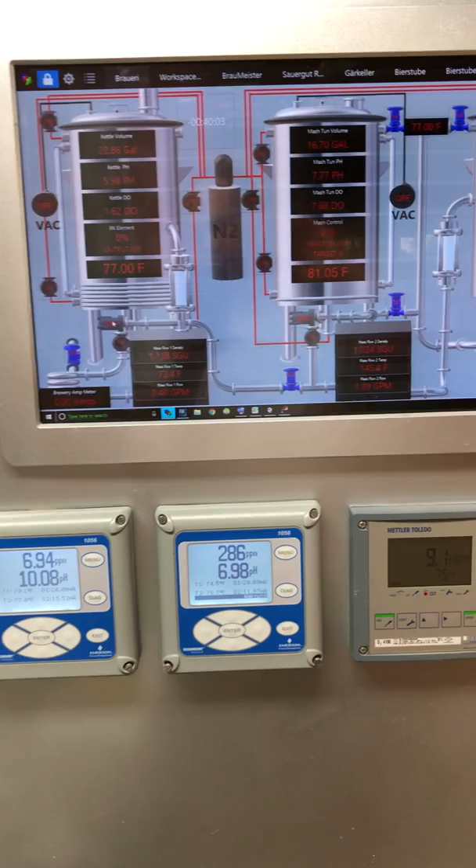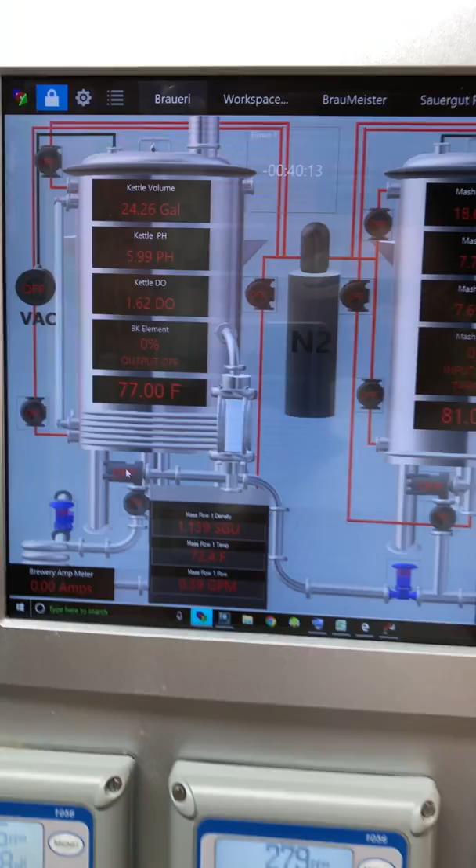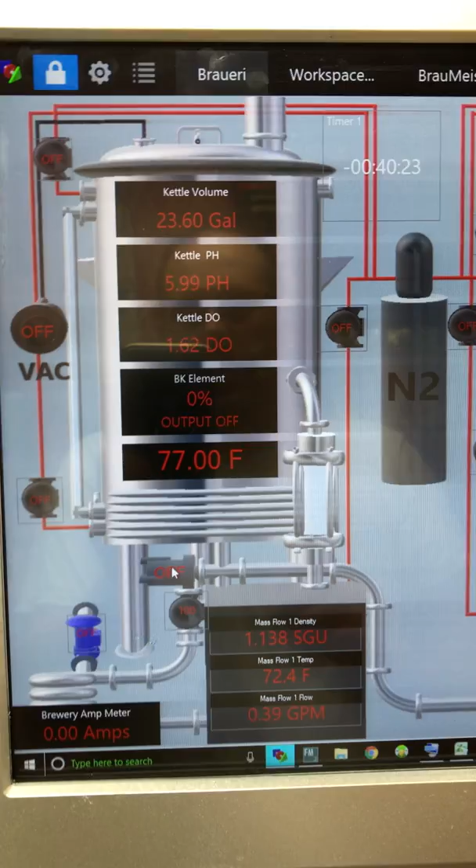So let's start with the control panel, and I've been getting a lot of questions about the purging and the vacuum on the kettles. The kettles themselves are actually sealed. They're gasketed and they have a band clamp, much like a fermenter. And so you can actually purge these vessels by pulling a vacuum on them. There's pressure relief valves at the top, right there.

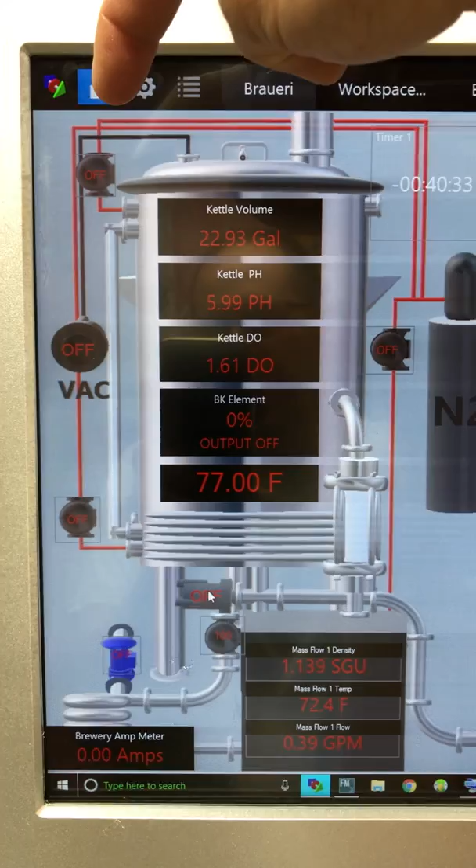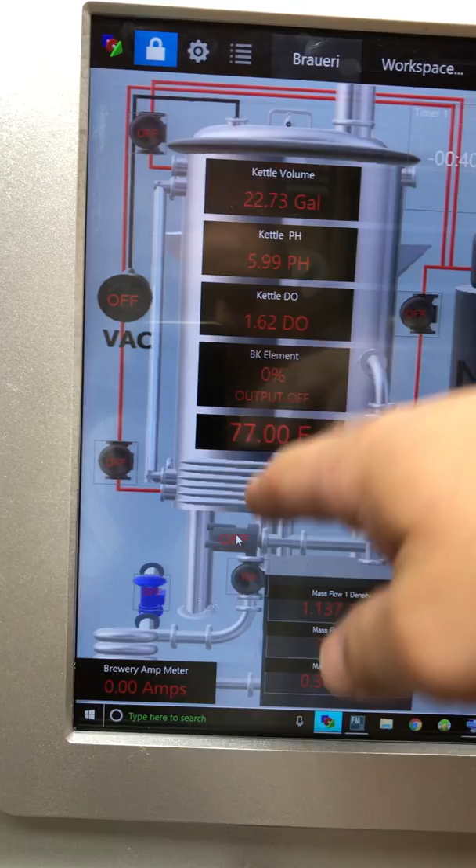And then you actually have solenoids for purging nitrogen. So you have a lower and a higher. Empty containers, get the bottom purge all the way to the top. Vacuum pump, it attaches to the top of the lid here via a tri-clamp. And so when you're purging, it automatically pulls a vacuum to make it much more efficient.

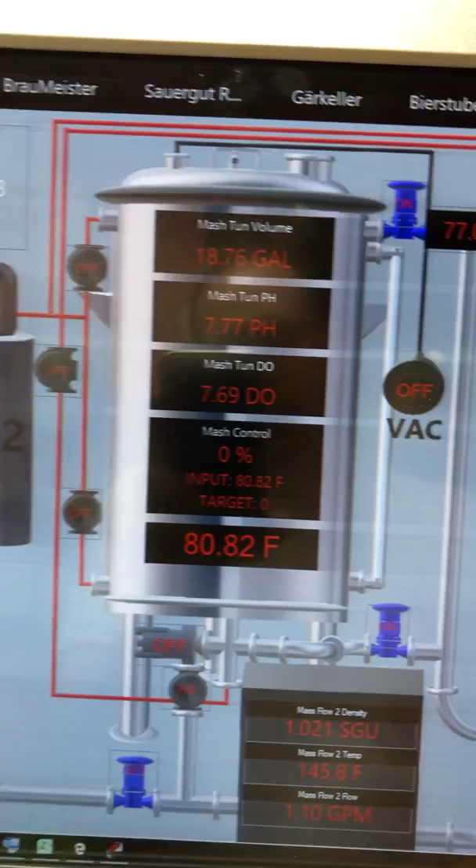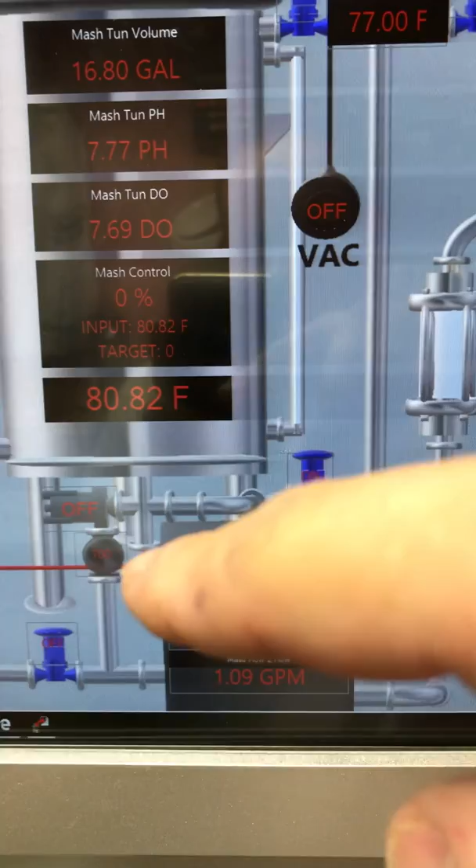So each vessel actually has a bottom and a top. So if there's liquid in the mash tun, you can purge the head space only. Same with the hot liquor tank. There's also some extra ones for purging tubing. This one here purges all the tubing for the mash tun. There's another one that purges all the tubing for the hot liquor tank.

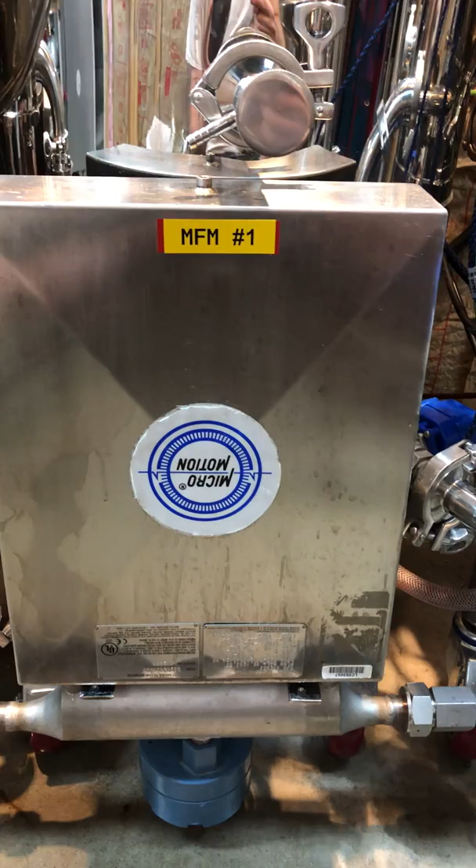And there's another one that purges all the tubing for the water into the boil kettle. So all the lines can be purged. There's no vacuum on those lines, just a straight purge. The other question is, what are these boxes? So these are Micro Motion Coriolis flow meters. They read real-time gravity, flow, and temperature. So you can get a real-time gravity of whatever your wort is on the fly at any temp.

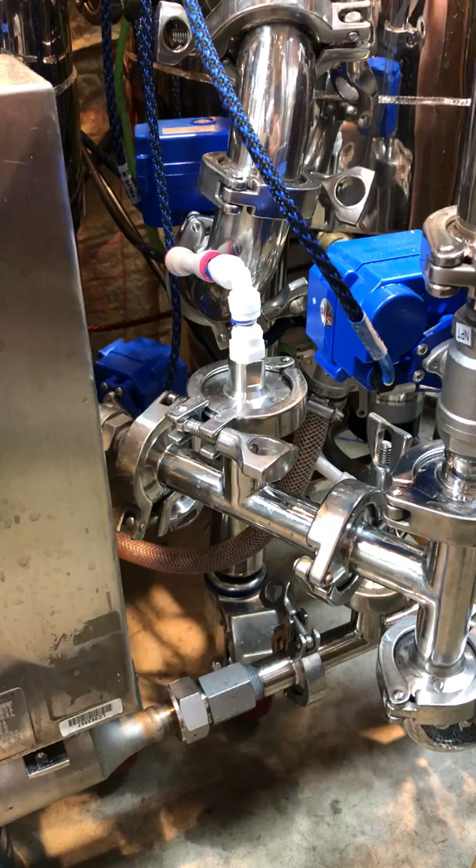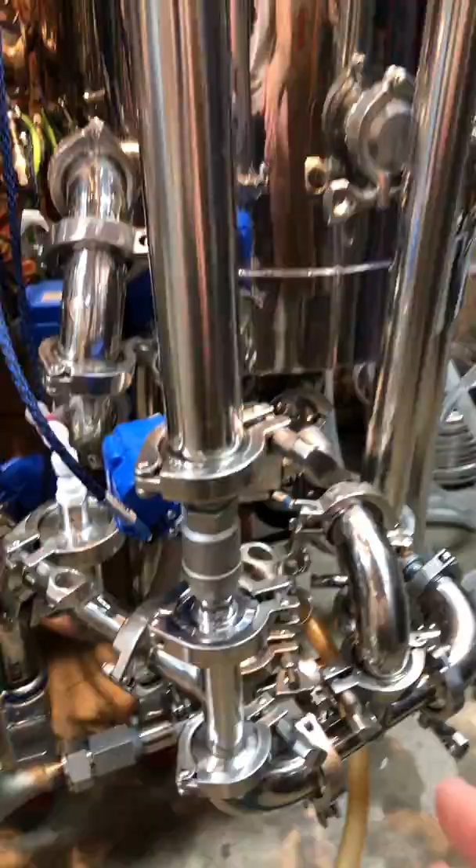The purge check valves and stuff look like that. So they're controlled by solenoids in the panel. And like I said, they have check valves on them, so they can just push and clear tubing, and they're kind of all tucked in here. They're everywhere on the vessels, on the tubing, just to make sure you have a low oxygen environment.

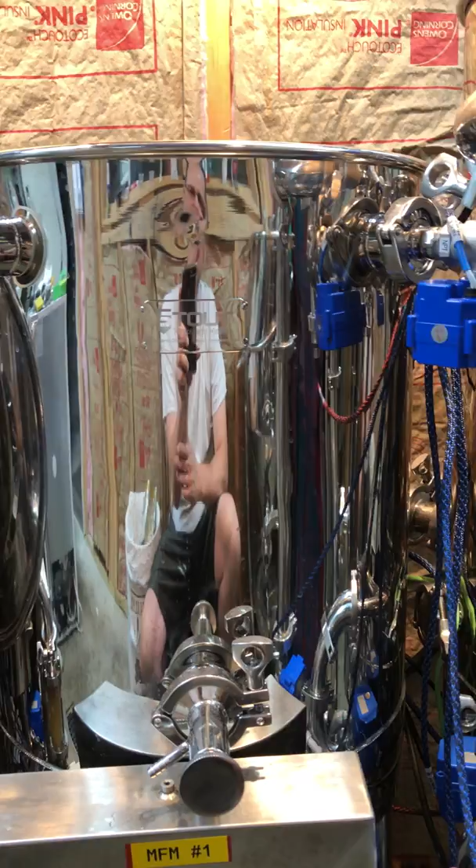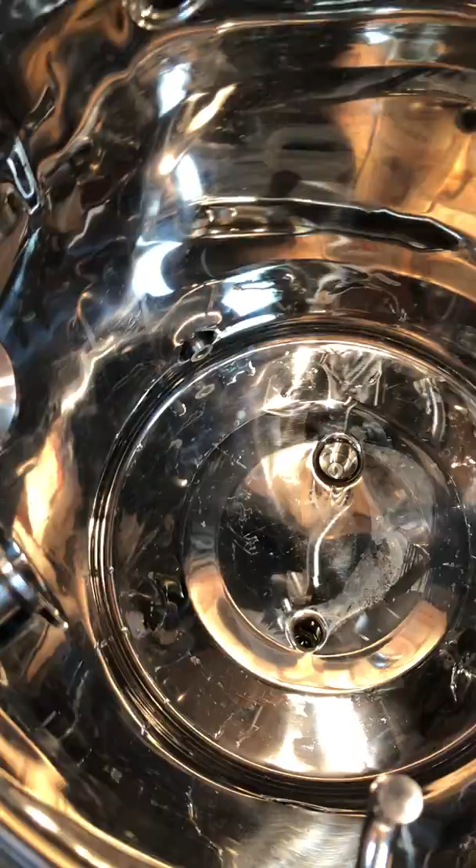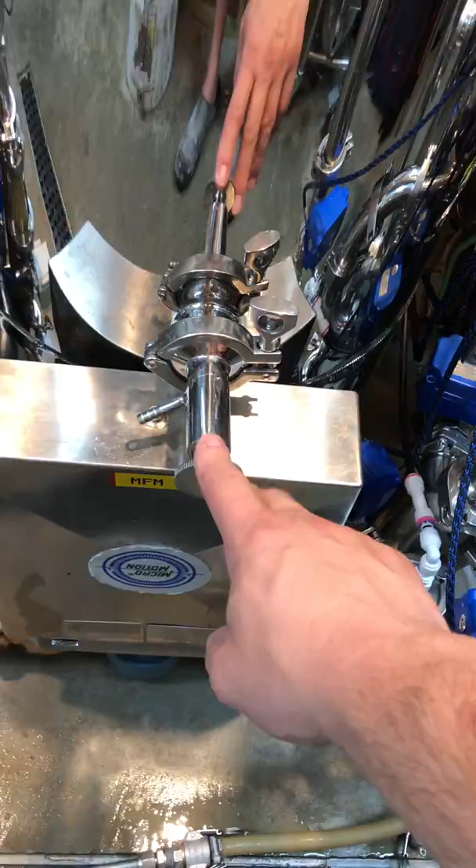Because they are sealed kettles, when you're mashing, if you want to take a pH sample or gravity reading for any reason, even though you have that all in line, because these also have pH and DO probes in the vessels, along with pressure for volume and flow sensors, proportional valves, and the whole nine. But if you would want to take a sample for any reason, since it's sealed, you just use these sampling valves. Every vessel has a sampling valve in case you want to take a reading.

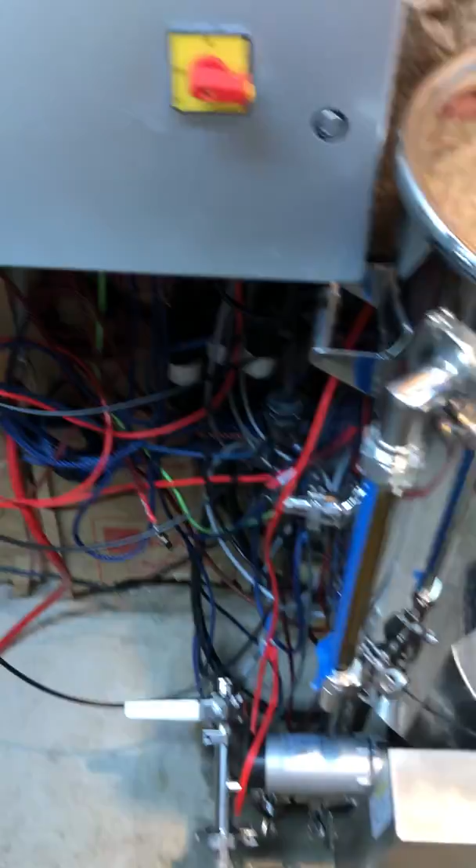It's kind of a mess down here since this was just my inaugural test brew, but all these are hooked up via panel connections like this. There's your solenoids, sloppily put together for all the different purging.

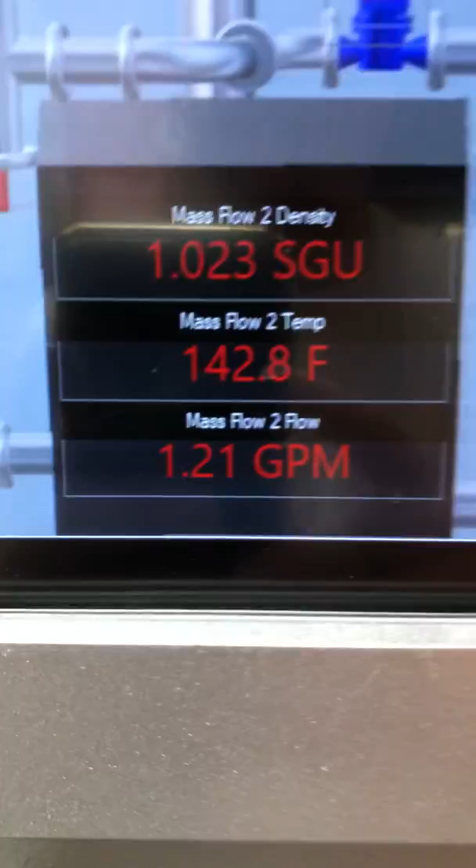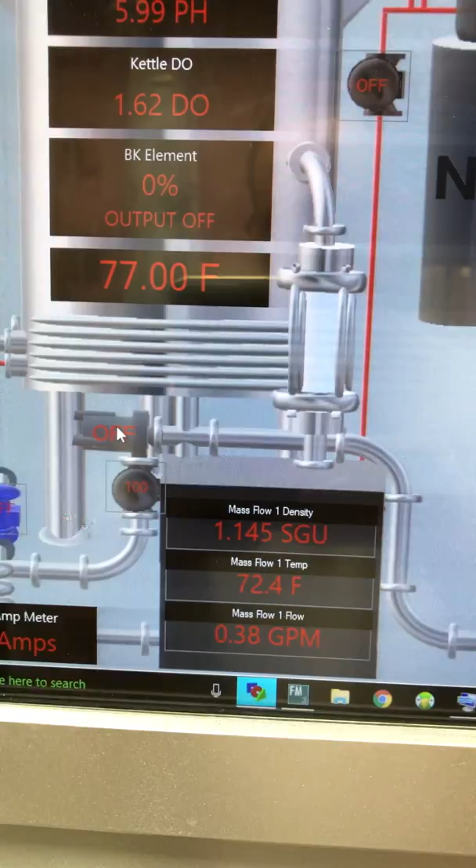Here's your real-time readout on the control panel for your mash tun, density, flow, and temperature, your boil kettle density, flow and temperature. Here's pH and DO for the boil kettle, pH and DO for the mash tun, and pH and DO for the hot liquor tank.

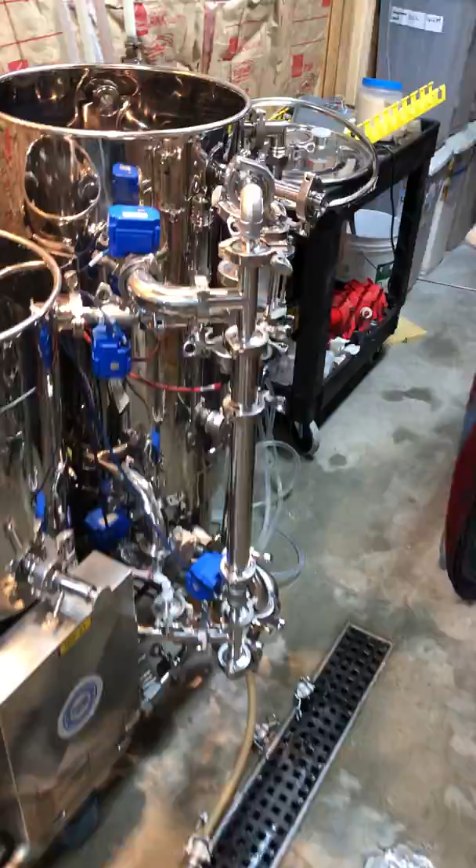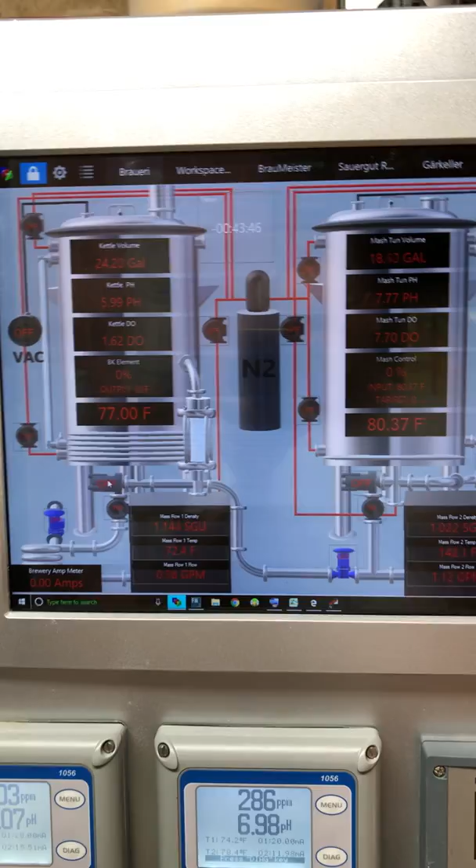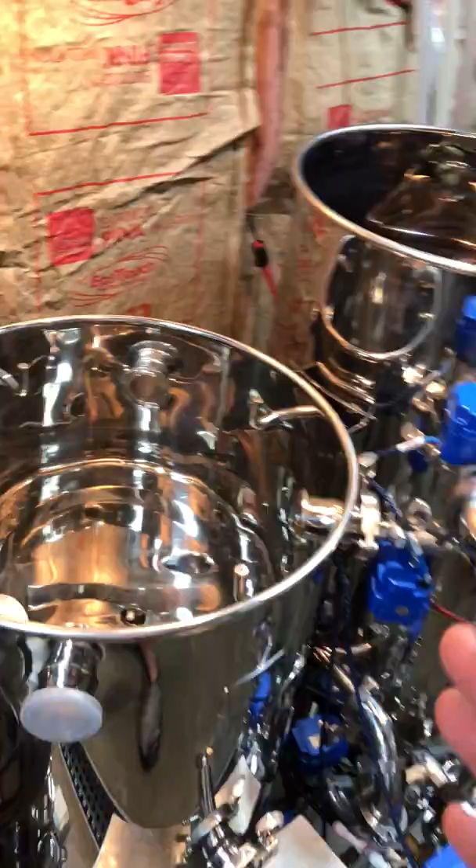Other than that, I can't think of anything else. Electric ball valves everywhere, and it's all controlled via the GUI. And it isn't automated yet because I haven't written the script, but I have started on the script. So soon it will be almost 100% automated. I will still have to add grain, but we're working on that with a grist hydrator, and I have to add hops, and I'm working on that, an automatic hop dropper.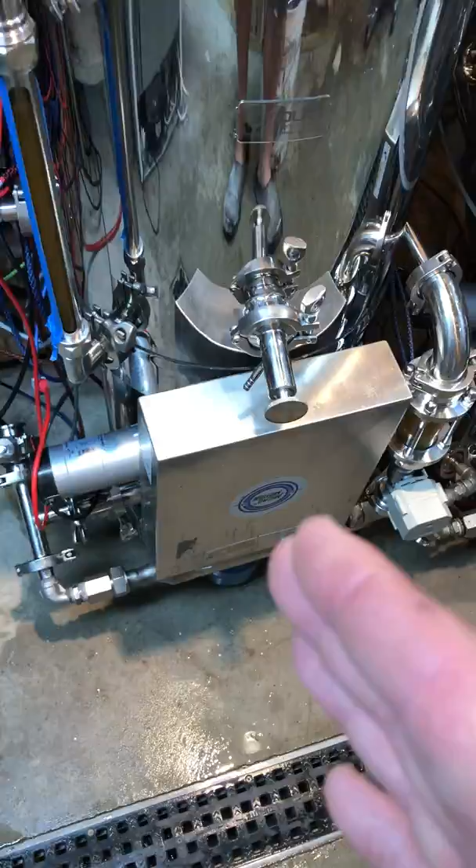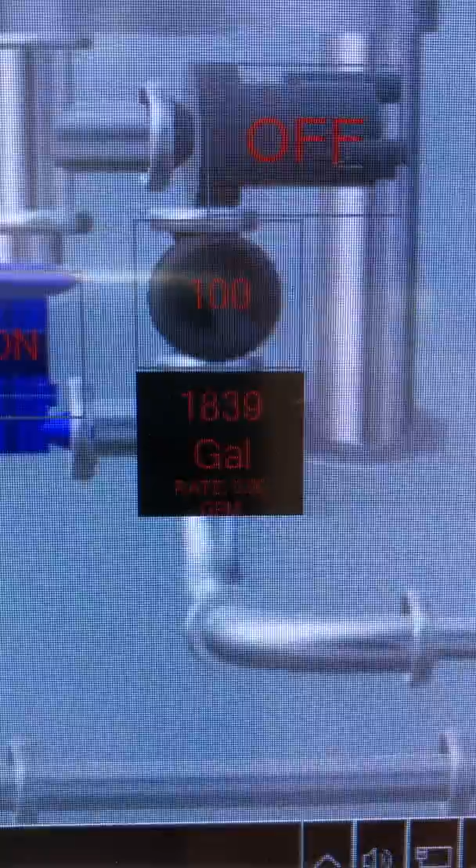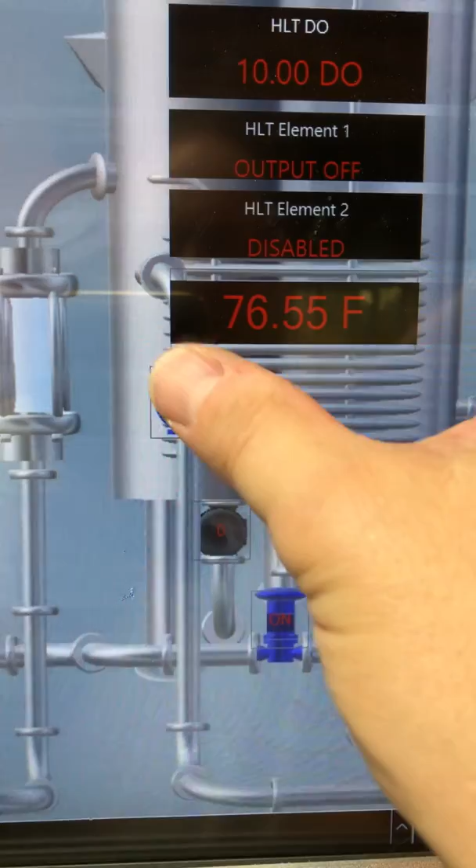So that's to come. Otherwise, each vessel has proportional valves, pumps, 3 pumps, 4 proportional valves, and so I can set flow at any rate. Here's my flow. There's nothing going on there right now, but that's how my flows. I have flow here, and you can simply manual override valves by tapping them. That turns it on, turns it off.

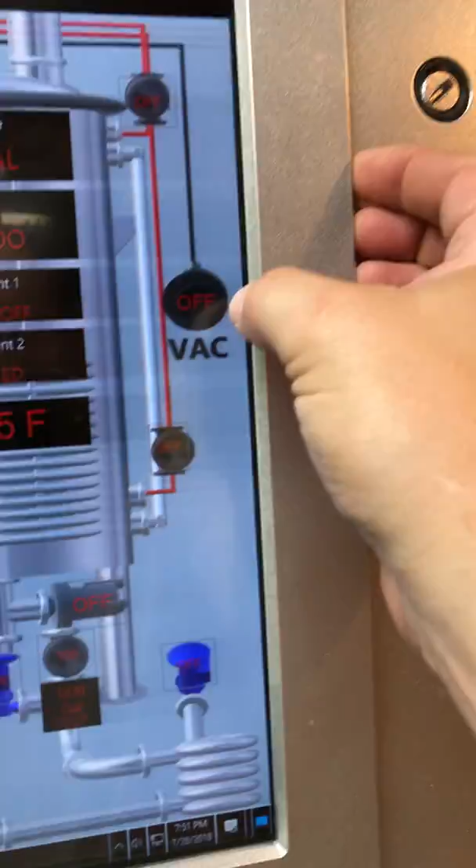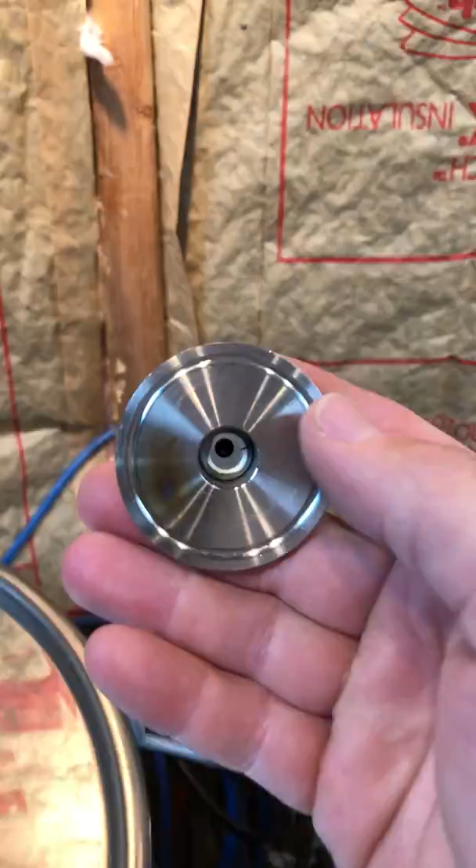Same with the purge and vac. I can pull a vacuum. I don't know if you can see or hear this, but it just pulled a vacuum on my finger. And so these are all the manual overrides.

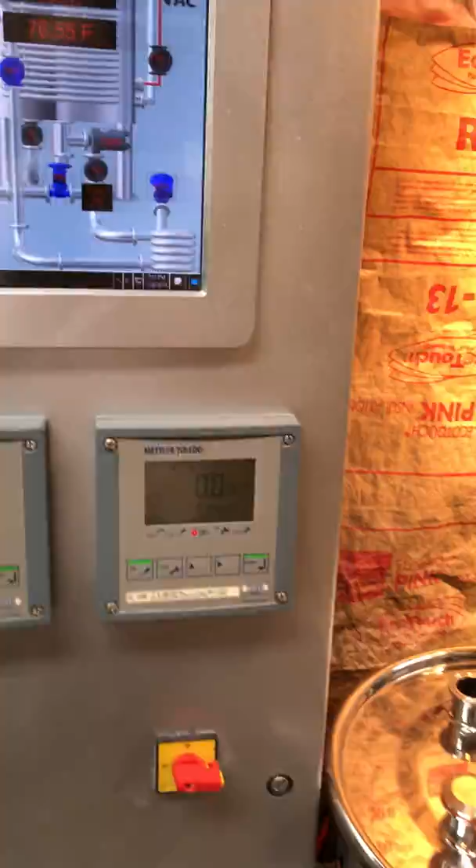So that's about that. Hopefully that answers some questions. It might make some more questions, but if you have any, just let me know.